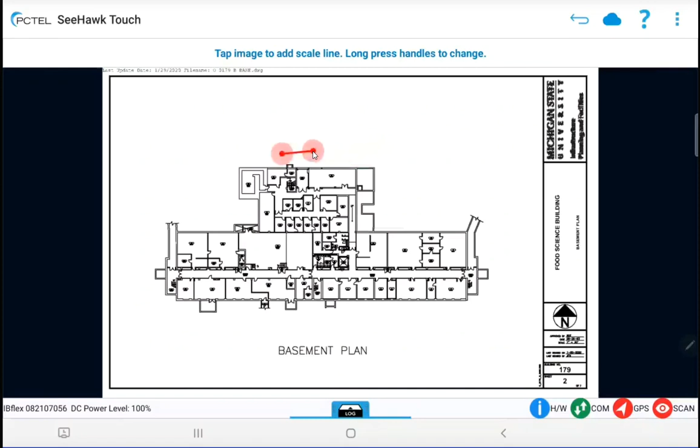And so now we just want to pick a floor to start on. We're going to be dealing with the food science building, and I always just start in the basement and work my way up when doing planning. So we'll grab the food science basement, and then we definitely want to do register with a ruler. This is going to allow you to put a line on it like this, and we can make it nice and small like this. Basically what we're trying to do is set a scale.

Best thing you can do is try to grab a 3 foot doorway. That seems to work fine. So about like that. That's about 3 feet if you compare it to a doorway. Then just tap on it and set scale and just say 3. And that will set our scale for our grid, and then just do next.

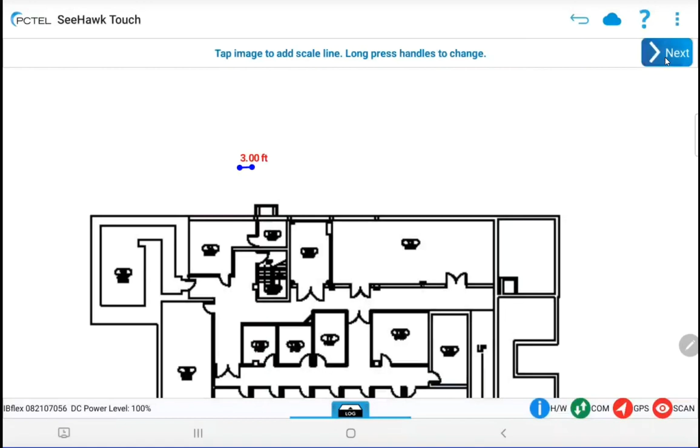And then what we want to do is name our report. Since we're in the food science building, best thing is to name it food science. And then we'll just hit OK.

And here we go. So we have our image loaded in, and now we want to put in our grid. So we'll start by just clicking in the map area, and that's going to start giving us the opportunity to create a grid. Just as I was looking at it, in fact, let's do this. Let's look at it.

So I would say the best way to do this would be to take a measurement here on the west end, one in the middle, so that's 2 total measurements, and then one on the east end, so that's 3 total measurements. And that'll give us, for the purposes of the high level testing of the buildings that we're doing for this project, 3 data points for this section, and that will be fine for what we're doing. And then we can create another grid and see if we can't get a measurement somewhere around this area. So let's create our first grid first.

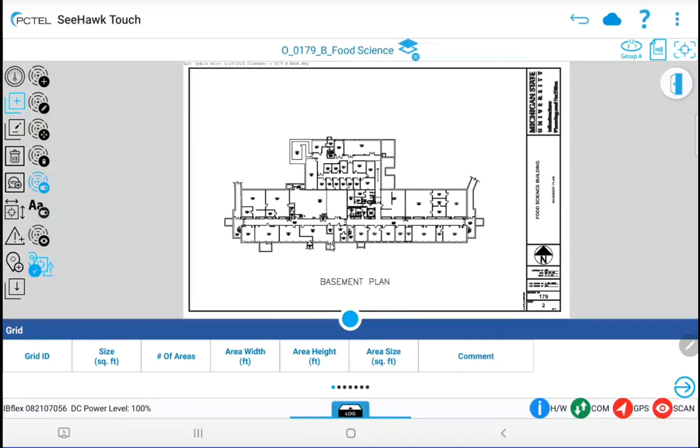And so we'll just click inside the map, and it gives us the opportunity. So we said we wanted 3 measurements essentially in a straight line. So we'll just make this 3. So it'll give us a grid with 3 squares in it. And what I like to do is change this color to magenta or something other than black, so it will stick out a little bit.

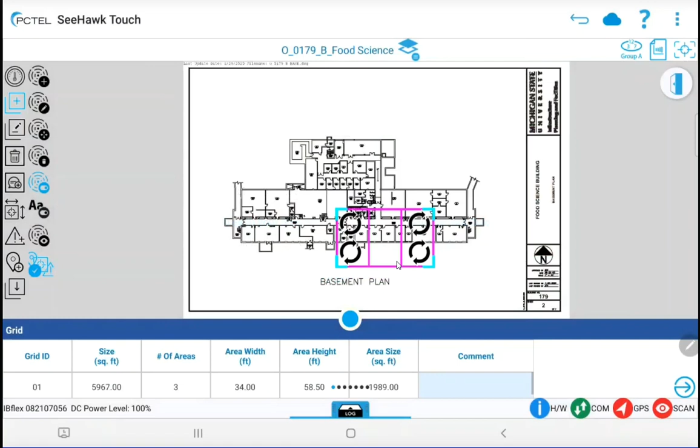And then for the purposes of this video, maybe we can make this a little thicker too, so it's easier to see. Then we hit OK, and there's our grid. You see it's got the magenta color and a little thicker lines. That helps us so we can see it. And then we just kind of get it where we want it to be and then stretch it.

Like that. Looks like it's a little laggy because I'm using the mirroring software. But anyways, we got there and we built up our grid, and then we want to do another grid for this area right here.

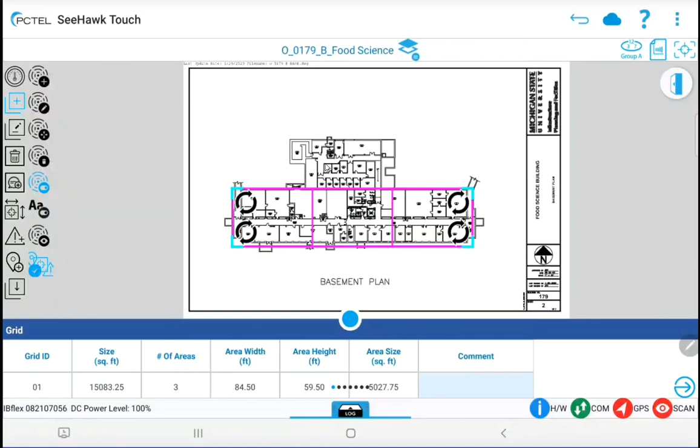So we'll push the plus sign once again, push in, and then I think we can handle that area with just 1 square. So we'll do this, and let's make this a contrasting color of the magenta. So let's pick blue so we can tell our squares apart, and make that a little thicker. Okay, there we go. Okay, so here's grid number 2. Zoom in a little bit and go on grid.

Sometimes it wants to rotate when you get those. It's kind of a pain, but there. So there's our second grid. So you can see it even identifies it. So it says grid 1 and grid 2. So now we have our 2 grids, and then let's go ahead and put a little mark where we assume we're going to take our measurements. We're not out in the field yet, but we can get a pretty good idea of what we want to do.

So what we'll do is click this square with the arrows next to it, and then grab our shape, and then we can pull it to where we want. So I would say I'd like it to be somewhere in that area, and then for this one, dead center if possible would be good, and then this one, spread them out a little bit. So that takes care of grid number 1. And then we'll take grid number 2. Looks like it came out right about where I would want to take the measurement, so that worked out well.

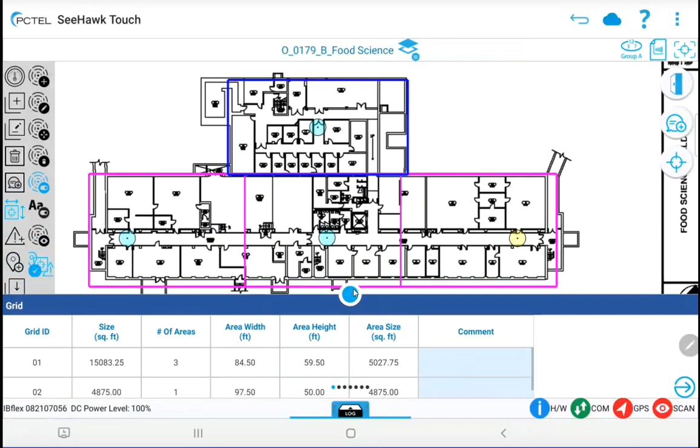So from here, we pretty well built up our grid pattern. Another point of interest here is to bring this up. We can see some statistics about our grid, and what we really wanted to concentrate on was the area size, and we can see that these are relatively close together, so that's good. So this was grid number 1, the top, or the magenta one, and the square footage of each one of these grids is 5,000 feet.

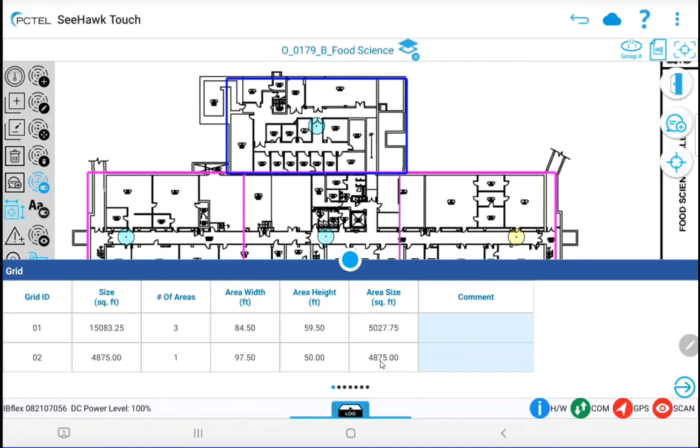And if we look at grid 2, which is the blue one, we're 4,800, almost 4,900. So we're pretty darn close in our square sizes. So that'll give us the most accurate information. So next thing to do is we have 3 more floors to build up. So we'll click up here at the top and save the changes. Yes.

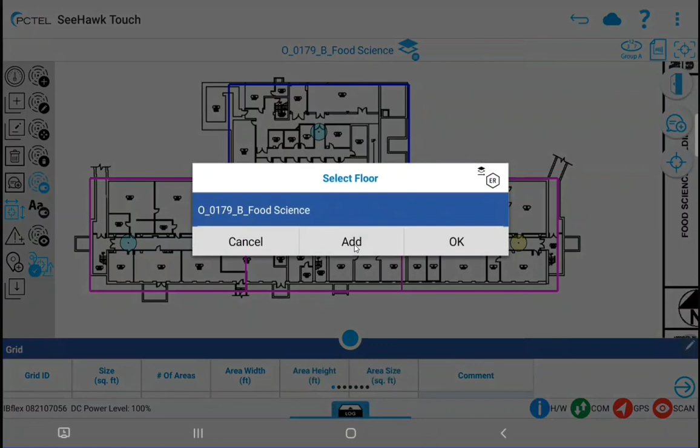And now it's going to say we want to add another floor. So add. And then we're going to load an image file. So this kind of goes back to where we started at the beginning. And this time we'll grab floor number 1, since that's the order that we're working up. So now that we have that, once again, we want to register with the ruler.

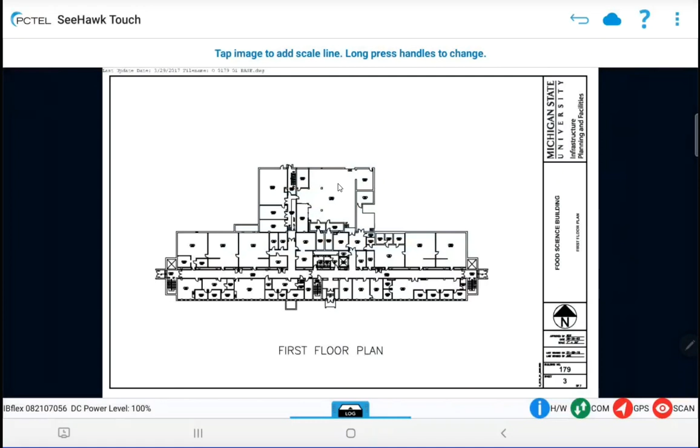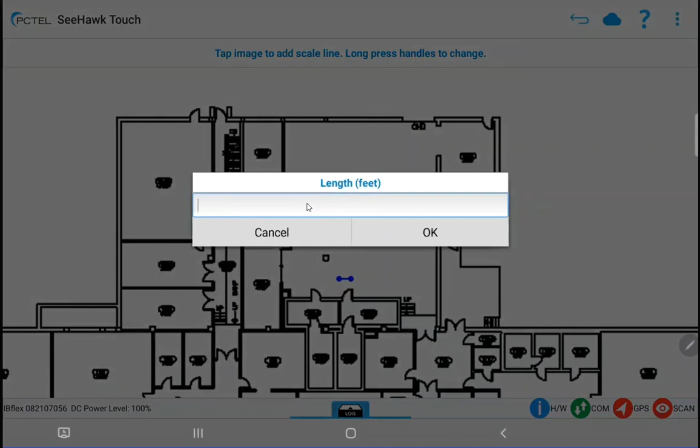And here's our floor plan again. Zoom in a little bit once again, and let's try to drop a line down here. So what you do is you grab it and hold it, and once it turns red, that means you can drag it. So you just try to get something close to the size of that door. The size of the doorway typically is 3 feet. So once we got that, we can click in it, and it's going to say set scale, and we'll say 3, and enter, and that's done.

And there we go. So now, instead of recreating all that grid stuff that we did, we can hit this little drop down arrow right here, and it'll ask you if the floor plan can import the grid. So we'll say yeah, sure, and then we'll say okay, and accept the defaults, and there you go. So we've just imported all the information. So that went pretty fast. You can take a look. You may have to trim things up a little bit if the floors don't line up closely, but these ones look like they're pretty good.

So we're done now with the first floor. But there's one thing we usually want to do on the first floor is we want to add a reference marker. So we'll hit reference and then put it out here. You gotta kind of know the building before you do this, where you might want to be taking a measurement, but I believe the loading dock is right around this area. It's gonna be somewhere over here.

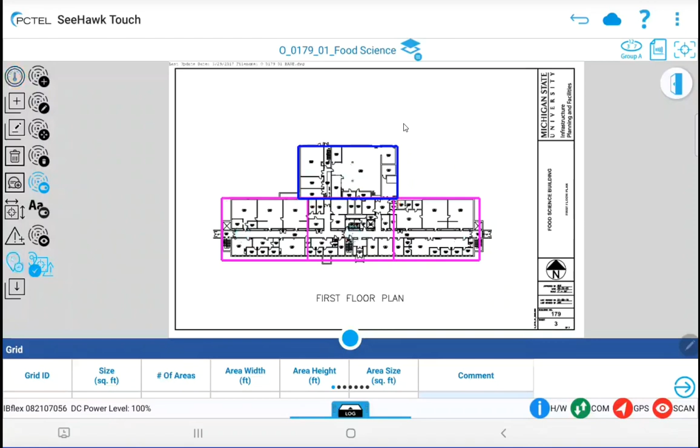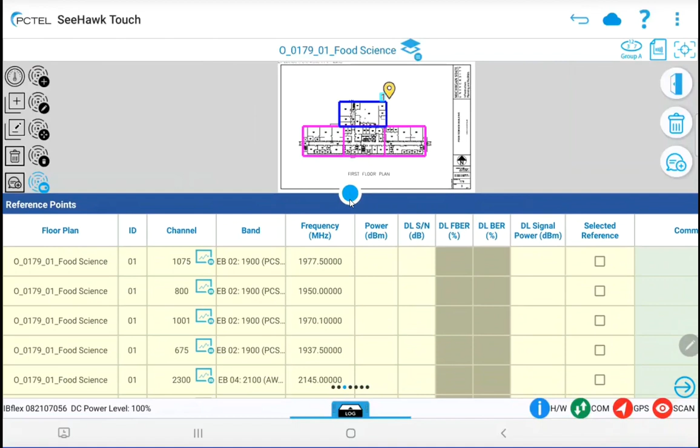So basically this is a spot when we roll up onto the building, before we even go inside, we can take a reference measurement, and it will allow us to just have a baseline measurement to compare the outside signal to the inside signal. So it's good to have that baseline in there. Okay, so that's all we need for that. So then we'll save that, and then we'll go ahead and add another floor and load and register an image.

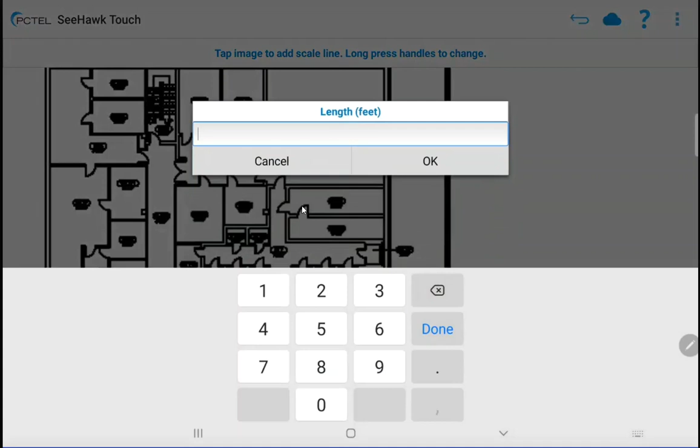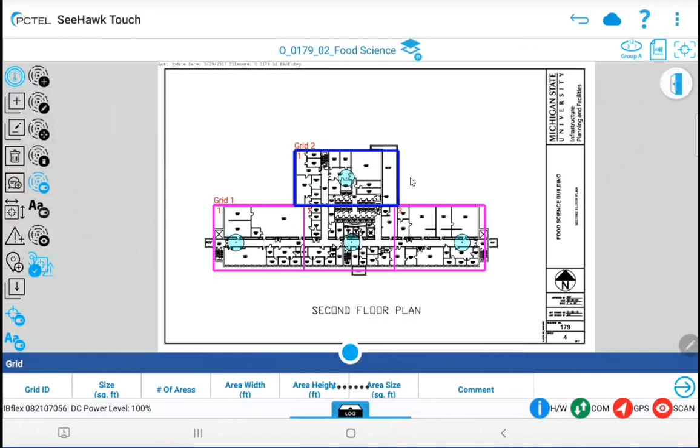2, register with the ruler, same as before. Try to find a doorway or something. Get your line. Sometimes you gotta hold on, wait for it to turn red. And there we go. And that will drag in about like that. Set scale. 3. And then okay. And next. And here we go. And then we're just gonna go ahead and say yes to that. And we can go ahead and use the basement probably, because that's where we started. So that brings it in, accept the defaults. That's okay. And this I think was the one that we have to, yeah.

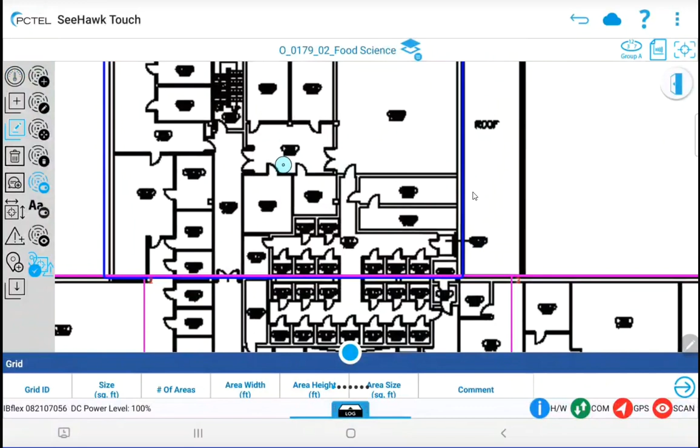So once we got on the second floor, the second grid changed a little bit inside. So just be aware of that. Sometimes it's not cookie cutter. You may run into situations like this. So you can just go ahead and edit, and then click on the grid, and you'll get your editing tools again. So just drag it in and try to make it as accurate as possible. I think the rest of the building stayed the same. Yeah. So there you go. So we're done with floor 2.

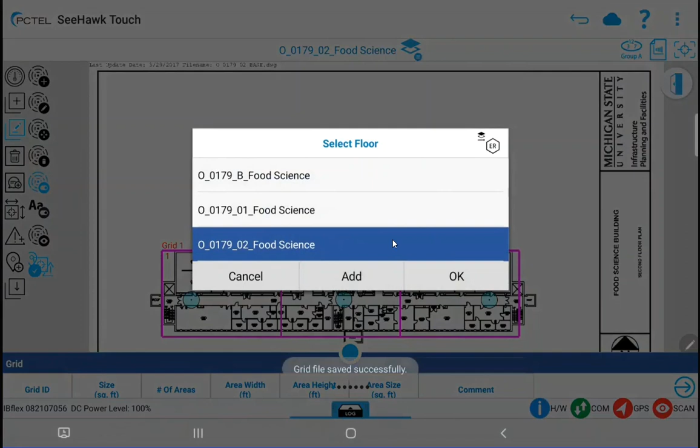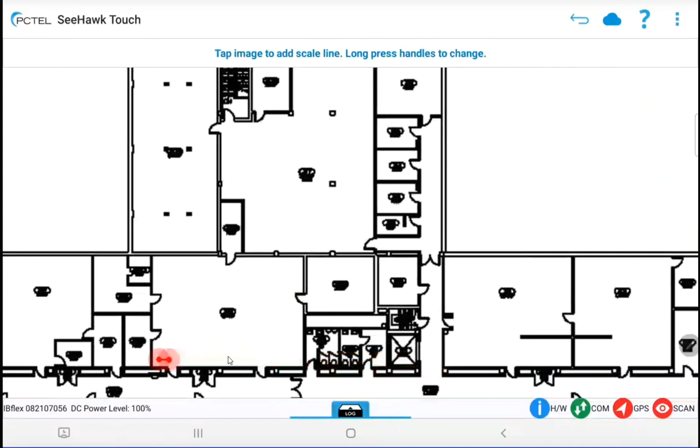So we have one more left to do, and that will be floor 3. So I go ahead and add a floor and load and register an image. Grab 3, ruler, and then zoom in a little bit here. Find ourselves a door that you can grab real fast. How about this door? And then hold down until it turns red, and then just drag it and compare. It looks pretty close there, 3 feet. Set scale, 3 feet. Okay, next. And then bring in the grid.

This floor plan will be clear, yes. This time I'd say bring in the one from the second floor, because we did that little bit of modification, so that will auto bring it in, yeah, so that brings it right in. If we would have brought the one in from the basement, then we would have had to modify that again. So now we're done.

We've got all of our floors in, and basically we're ready to head out into the field and start doing our walk test.

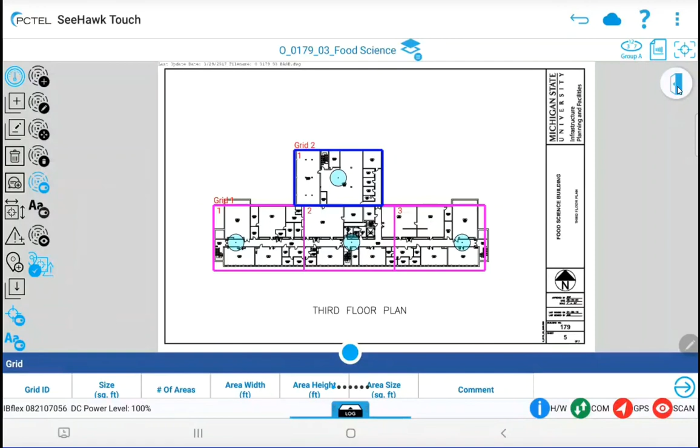A little note of interest: if you click this door right here, like that, you can see. If you don't modify this at all, it's going to scan, and the results will show you all the channels. That's pretty confusing, so the best thing to do is pick something that's a fairly well known signal on campus. We tend to default quite often to the Verizon.

AWS, this one right here. We're primarily care mostly about Verizon anyways, and Verizon tends to have their phones, if possible, default to the AWS. This is the 2100 gig or megahertz channel, and this is channel 66786. So that's a good one to choose.

So now when you do your testing, it's going to provide you with results. It will log everything, but as you're walking, it will show you the results for just this one carrier, and that's more of what we want.

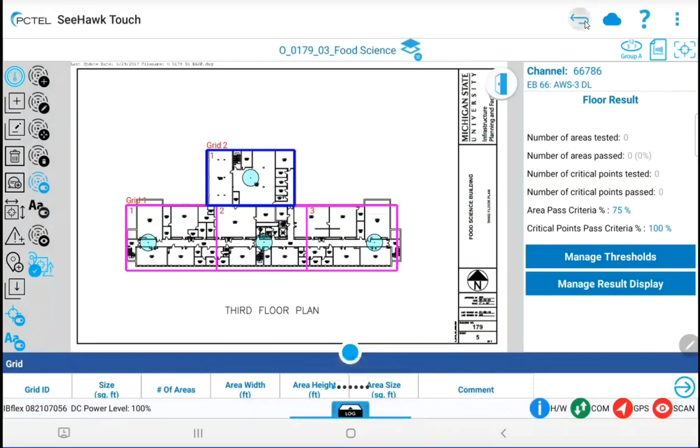So now, you go out into the field. You want to first save the work that you've done. What's nice here is this: now that you've done your work, presumably at your desk or someplace other than the field, a lot of times this is a lot easier to do in a more comfortable location than in a hallway before you set up for the walk. So usually you can exit and come back.

So let's say you've closed up your device. Now you drove to the job site, and you're back up, and you're ready to do the test now.

So what you can do is just come to the test list, like this, and go to indoor test plan - sorry, indoor grid test - and we'll find the one that we did, and that was this one right here. I had another one from the other day, so we'll just pick food science and then resume.

And it's gonna ask you to pick the scanner again. Not sure why it asked that, but here we go. So this is basically where we left off, on the third floor, but probably we'll start on the basement floor. That's no problem, so we'll just say that, and then okay.

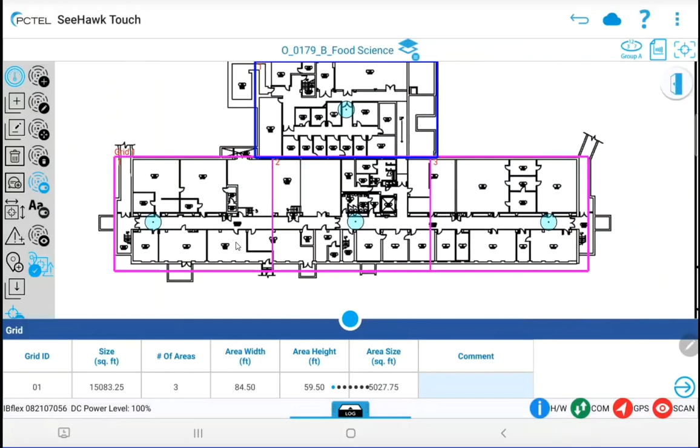So now it's showing us the basement floor plan. Let's say that now we're in the building, we've walked downstairs, and we're standing in this area right here, probably. Let's say we're in the west area of the basement.

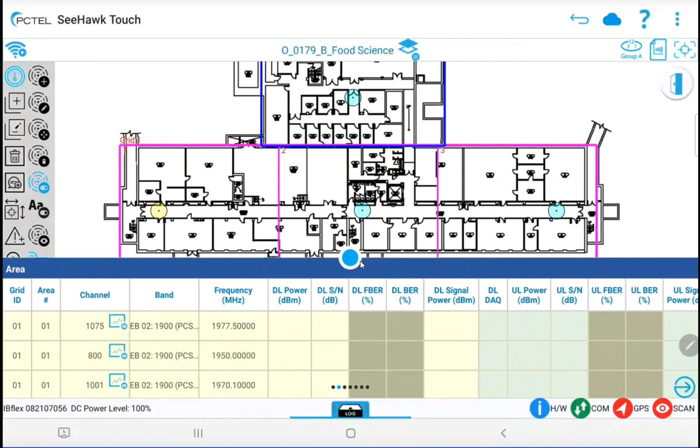So to get started, we push in. Okay, so we push on. Basically, we have to tell the software where we're at, so we select the little circle. So basically now it's cocked and ready to go. The only thing we need to do now is push the little Wi-Fi emblem here, or icon.

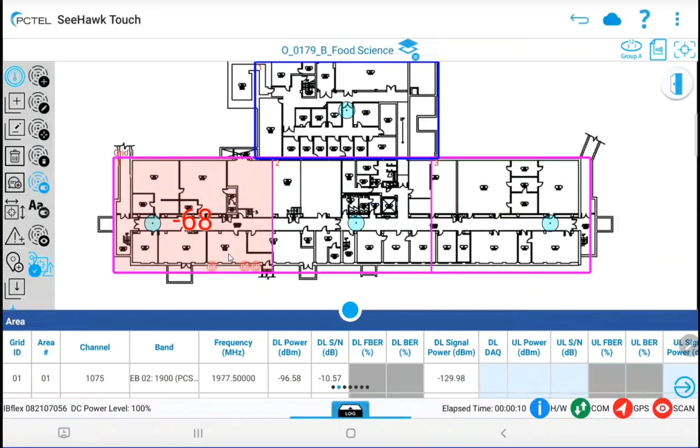And once we do that, it's starting to gather data, and you see it populating. As soon as it says add to report, you move on - that means you're done with that square. It's grabbed its data. As you can see here, it did grab some. Let's see, it grabbed the...

So apparently, when we go to the site, we actually have to change this. I didn't know that, so we have to tell it once again. I know we told it earlier, but apparently it didn't save that. So now we're telling it to look at this AWS, and as you can see the signal, it's now showing us the statistics for the Verizon channel.

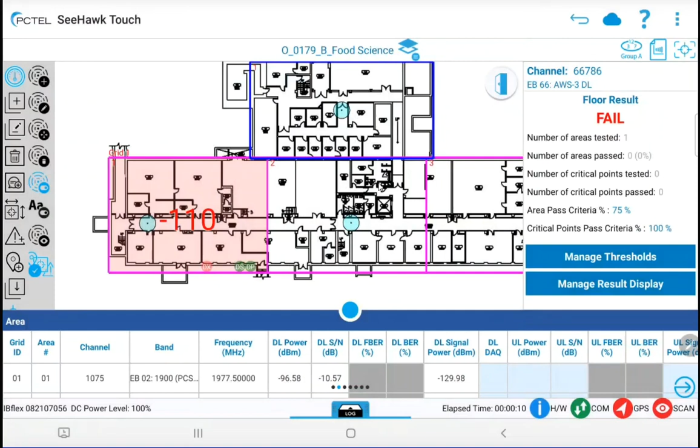We could just as well - for the next one, if we cared, maybe we wanted to look more at our P25 system, which would probably show the best results - we can just grab that, and as you can see, it gives us the results for that.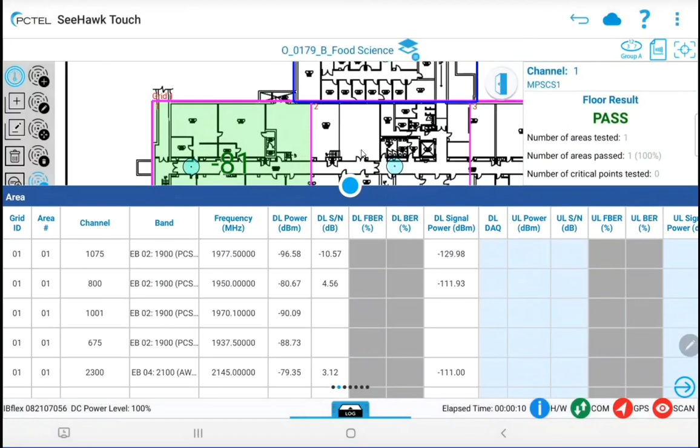So it's logged everything, as you can see in this data, but as you're walking, sometimes it's nice to get a good visual verification of something that's actually working fairly well. That was the idea behind selecting just one channel instead of looking at them all, because invariably if you're looking at them all, one of them is going to be bad, so they're always going to be red, and it's not going to make as much sense.

So let's say we walk to the next square, so all we have to do is select that, and that basically we're telling the software we're here and ready to go. Then we just push the icon and wait a few moments. As you can see here, it's bringing in the information.

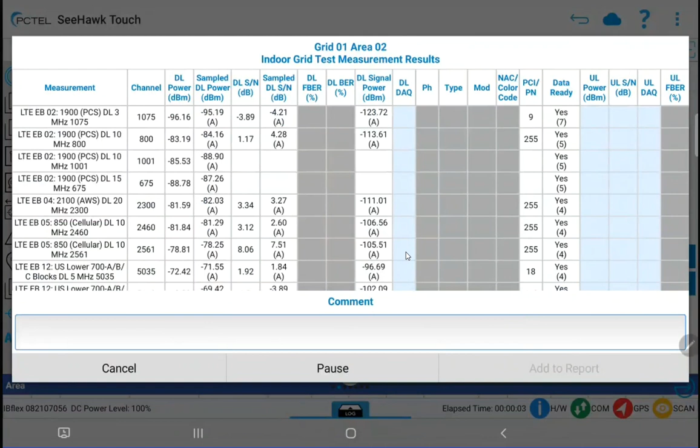And this gives you a chance to take a quick look at all the information that it's bringing in. As you can see, without much surprise, the PCS channels are coming in really good, and depending on your location, a lot of these channels aren't coming in too well. It just depends on where you're doing your testing. Looks like this 700 is coming in pretty good.

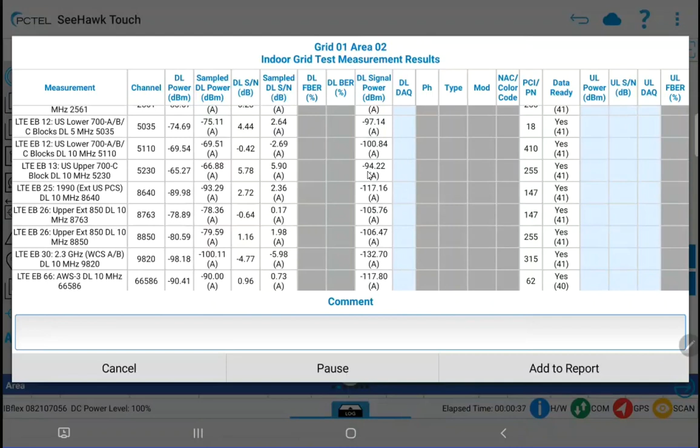And then you just add it to the report, and you continue that through your walk till you finish the whole building. So you can just walk around, select all your icons. Since I'm not actually walking it this second, all the results are going to be pretty much the same, but for the sake of completeness, let's finish this one up. Let's select the icon, let it bring in the last bit of data. So this is basically simulating that we walked the whole floor, and now we're pretty much done with that floor. If you wanted to move on, you would just select the floor you're going to, and then select it, and you would do the same thing.

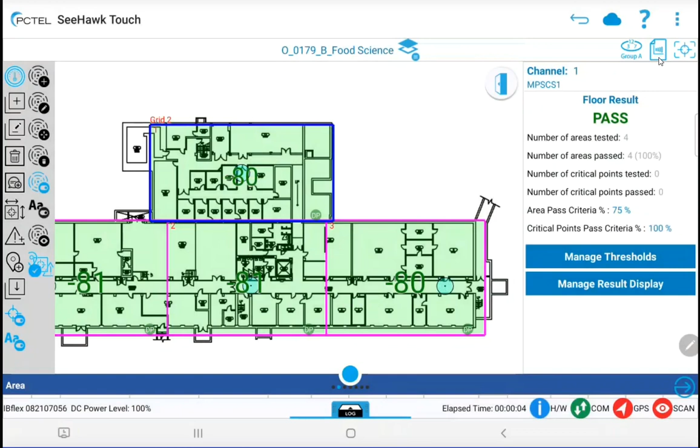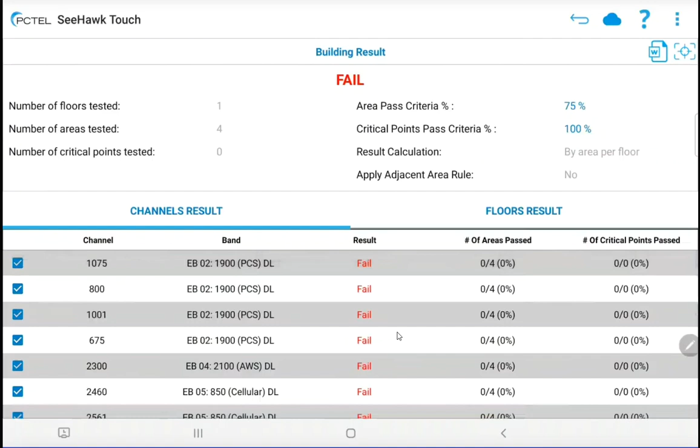I'll cancel out that for a second here. This gives you a chance to also take a peek at your data. Not too surprisingly, based on the spot where I'm at right now testing, things didn't go too well in terms of the results. And so this gives you a chance to verify that you've gathered data, and that's all we're doing right here. It's just kind of verifying that we have grabbed data.

You can generate a report, and that's another good way to make sure that you have the data before you leave the building. And so once that report's done, you can actually browse to see if we can get to the report by going to select the internal storage, and then we're on the SeeHawk Touch, and then you go through here, indoor grid report, and there we go.

So we find our building right here. A little confusing, so it might be a good idea to go ahead and name it so we know what it is, so we can do that right in the tablet software. I'd keep most of the file stuff the same, but just go ahead and give the building something that makes sense. So we'll see Food Science. There you go. So now it's a little easier to find.

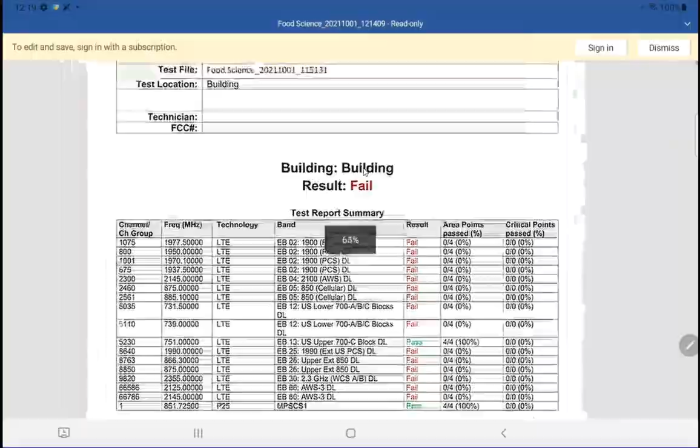So it created a kind of a high level report. So if we click it, it will open it up and give us the information on what it found. And basically, it's just a summary of what we had already seen.

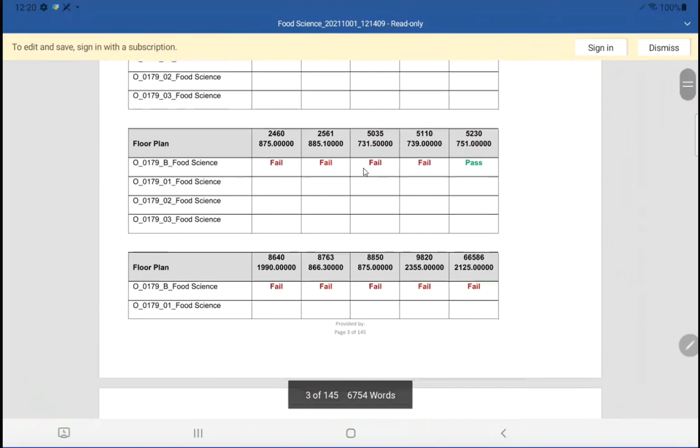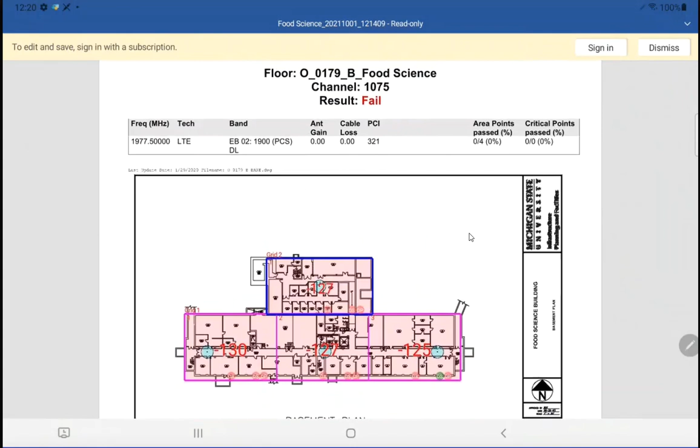But one good thing is that it is actually giving us confirmation. So this right here is actually showing us that we did get data, and it's all there and available. So that's a good thing. So we know we can leave the testing site with confidence, knowing that we have the information that we need.

So lastly, what we want to do is get that information off of the tablet and onto the shared drive, so it can go to engineering, and the statistics can be gathered from it into the master report. So here we are, we're browsing into the file. So on this side we're looking at the Samsung tablet, and we're in the indoor grid report folder, and here's the file that we created.

To see how we renamed it so we can quickly know which one it is. And then what we want to do is send this over to our shared drive, and this is basically on our network planning share. So if we look at where it's at in SharePoint, it might make a little bit more sense. But this is ultimately where you're shooting for. So you're going to want to pull the file off of the tablet and then upload it to choose the campus cellular survey folder.

Open that up, and then I've created a folder called RF survey. So just grab that, and then find the folder for the building which will already be there that I've created, and then go ahead and just put it in this folder, and that'll be it. And that should cover everything. Thank you.